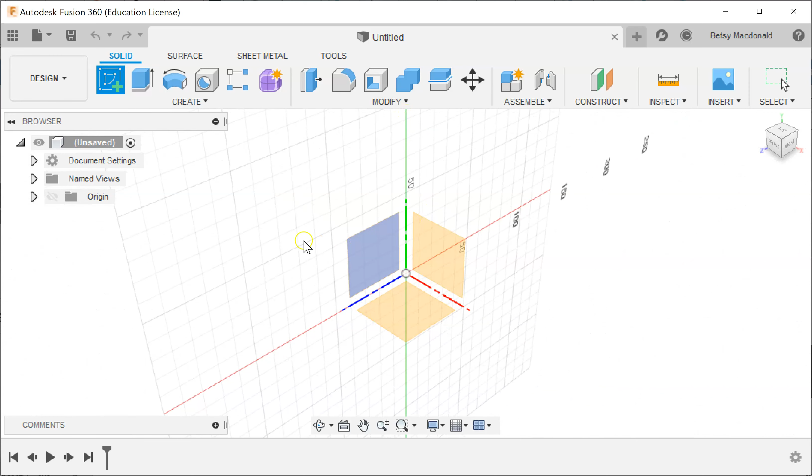So first of all, in order to start with a flat object, you have to create a sketch. You can do so from the Create menu, but there's a shortcut icon right here. So this says Create Sketch. So one of the things I want to point out, well, let me pick my plane. I'm going to draw on the floor like I usually do.

Okay, so this is where the details I want you to pay attention to start. First of all, the whole ribbon changed, and so it's showing us all these sketch tools. It also has a Finish Sketch button. Now, you need to press that when needed, but it's important that you don't press it accidentally. And I'll get to that a little more later.

You can also see it created a Sketches folder, and we're currently working on Sketch 1. It is pretty easy to accidentally make a lot of sketches, and if items are in different sketch documents here, they can't be connected together. So that all goes back to not clicking Finish Sketch unless you mean to.

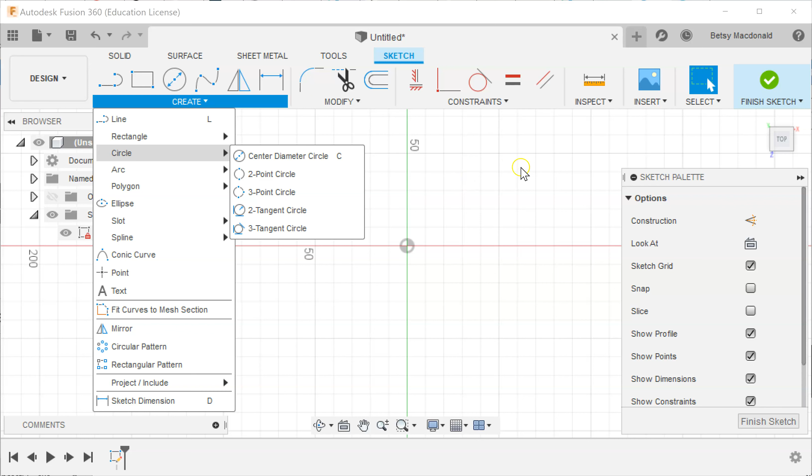So right now I'm in a sketch where I can draw a flat shape. You can see there's a line tool, a rectangle, a circle all ready for me to use. And there are more tools under here. We'll be looking at polygon today, line, rectangle, and circle. I don't think we'll be looking at arc today, but I may end up doing that. If you feel like you don't have enough space, you can collapse this sketch palette. I don't think I'll be referring to that, so I'm going to close it.

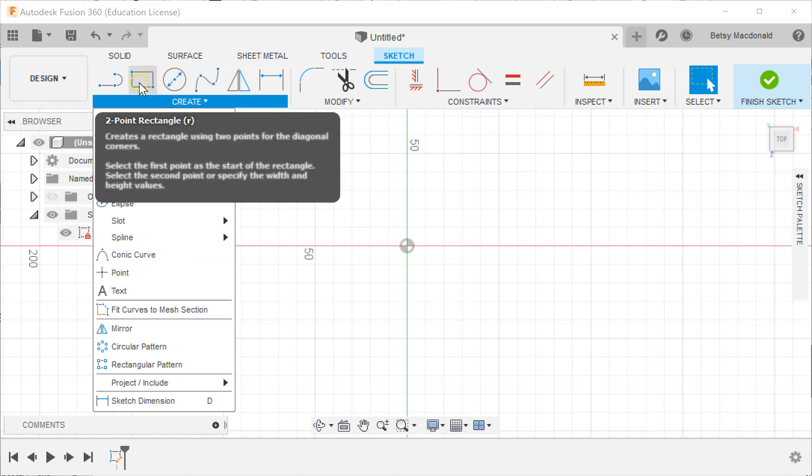Let's start with a rectangle because that's pretty easy. If you expand the menu, there's 3 ways to do a rectangle. I typically use 2-point rectangle, so clicking up here is just fine for me. And just like I suggested with primitives, click the first point, and then you move your mouse to the other point you want to make, and you can click again, and you have a rectangle. These indicators right here are just showing constraints, which I may show you in another video. So that is a completed rectangle.

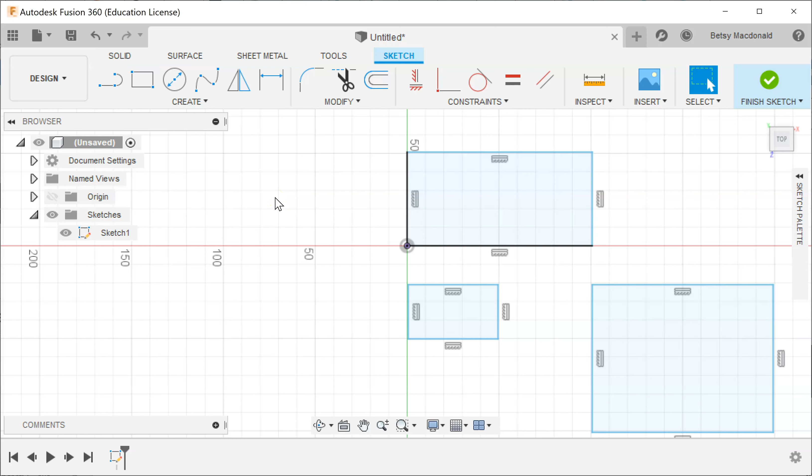You can hit enter for it to take place. Actually, I don't think we needed to click enter, but when I did click enter, I'm not in the rectangle tool anymore. If I hadn't hit enter, it stays in the rectangle tool. So if you want to draw more rectangles, you can. So once you're done with creating rectangles, you can either hit OK. Hitting enter actually is probably the easiest thing.

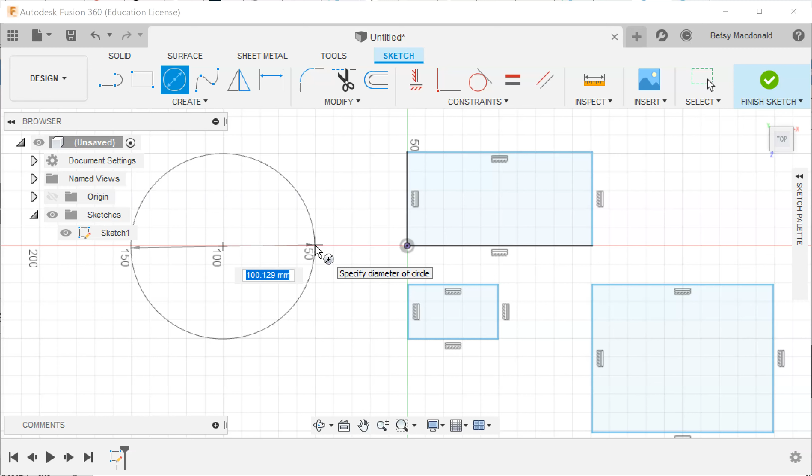The default circle type is a center diameter circle. And so if I click here and pull out, it's giving me a circle, and you can see that it's letting me choose the radius, or sorry, the diameter. So you can type that in if you want to get a nice clean number and hit OK. And again, oh, we're not still in the circle tool. Okay, so there's 4 shapes.

If you decide you don't want one, once you're back in the select tool, you can select one of the sketches you've already made or one of the shapes you've already made and hit the delete key, and it will go away. I think you can just click on it like that and hit delete also. No, that didn't work. So just select around it and hit delete. And so now I'm back to only having 2 shapes.

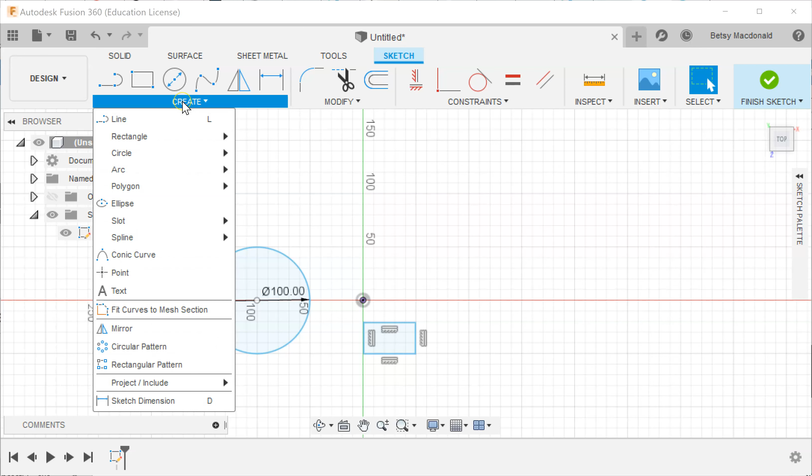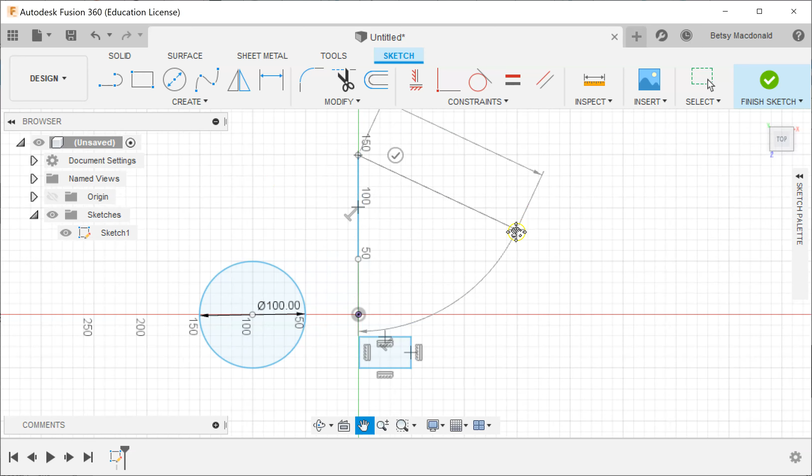Let's look at the line tool first. Okay, so click to start a line, and you can see it goes in any direction. So you can go up like this if you want. After you click another point, it acts as though you want to keep continuing, which is fine. I'm going to go this way. If you only wanted the line, you can click this green check mark and it will stop the line. But let's say you want to make a closed shape. So I'm going to make the shape of a house.

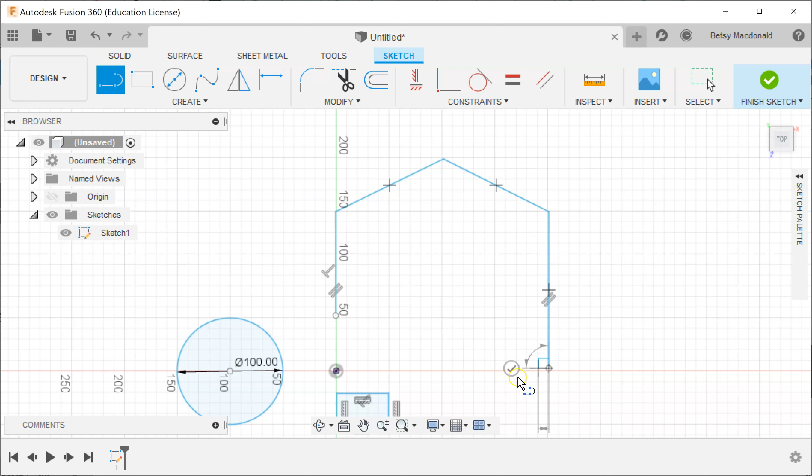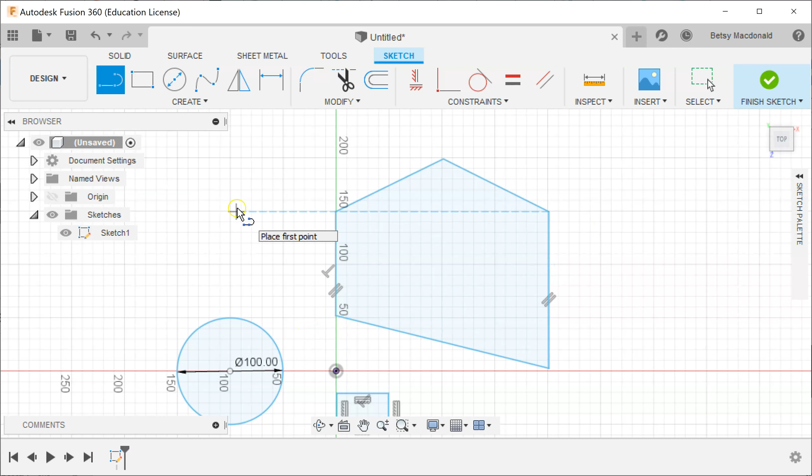So if you want to make a closed shape, whoops, I went too far. That's okay. When you get back to your original line, the line tool stops and you get a closed shape because the line tool is actually expecting that you're making a closed shape. If you're doing something else, you can click that green check mark. For example, and I'm still in the line tool, let's say I want to even this up and I click there.

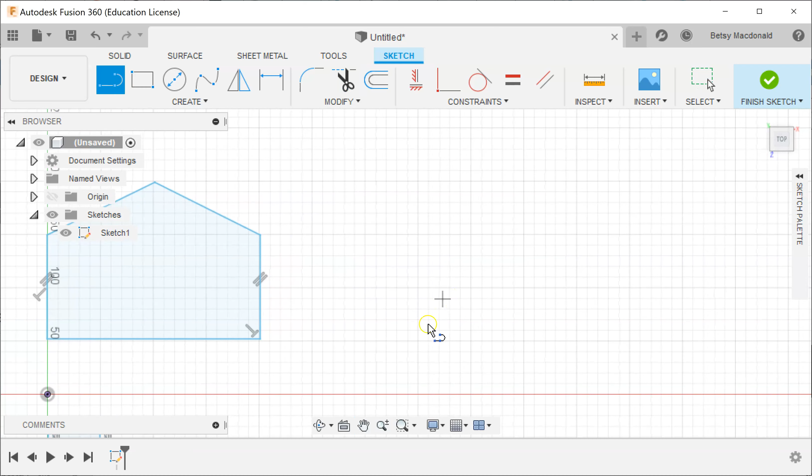That makes a little more sense for what I was going to do, which now means I want to get rid of these two lines, and that's what we use the trim tool for. So if you make lines you don't mean to, you can trim away the other lines. So let's do that again. Let's make, I don't know, what else should we make? And if you accidentally hit that, you're fine. You're still in the line tool. Oh, maybe you're not. If you're not still in the line tool, just go back to the line tool and pick up where you left off. Actually, I'm going to make a C.

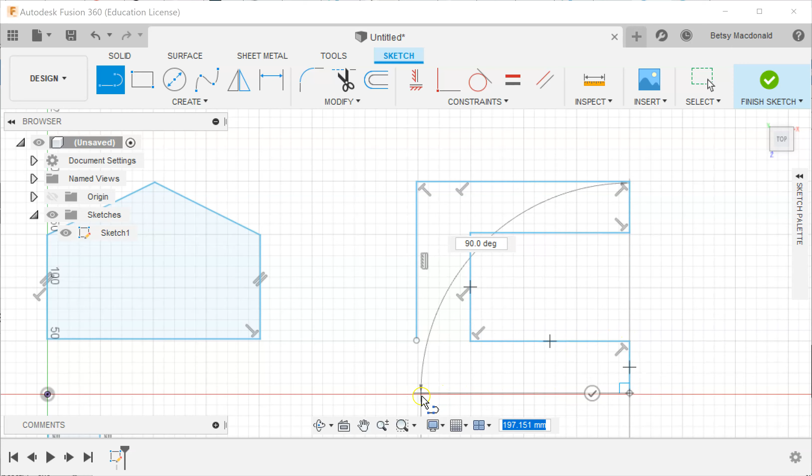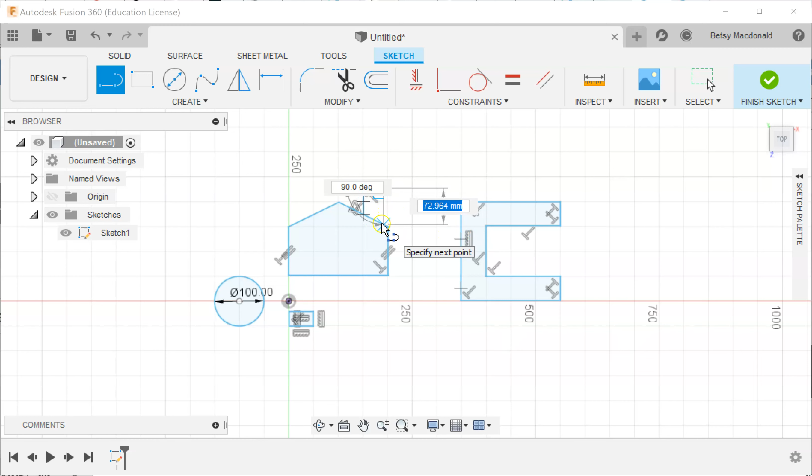There. And so again, you can tell it's a closed path because it fills in blue. So that's the line tool. If you decide that you want to make, let's say I want to make a chimney here, I can go ahead, that green dot's actually in my way. So I got to click the green dot and then add another line. And then if you don't want this intersecting line, again, that's what the trim tool is for. So there's a cute little house, and you'll see what happens more with that in a moment.

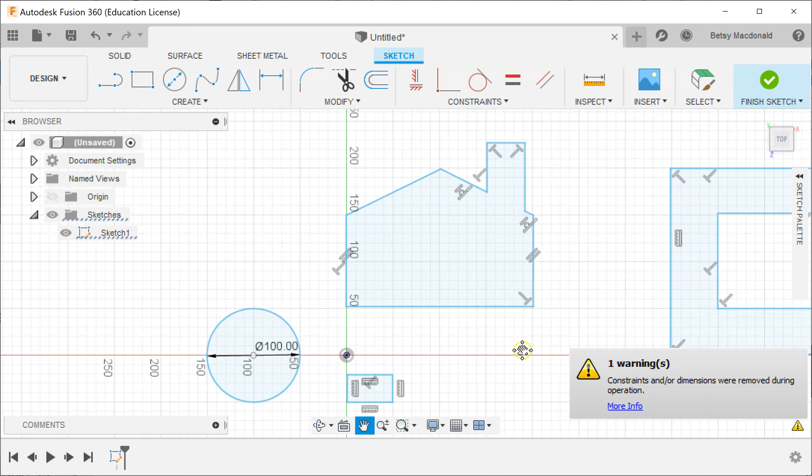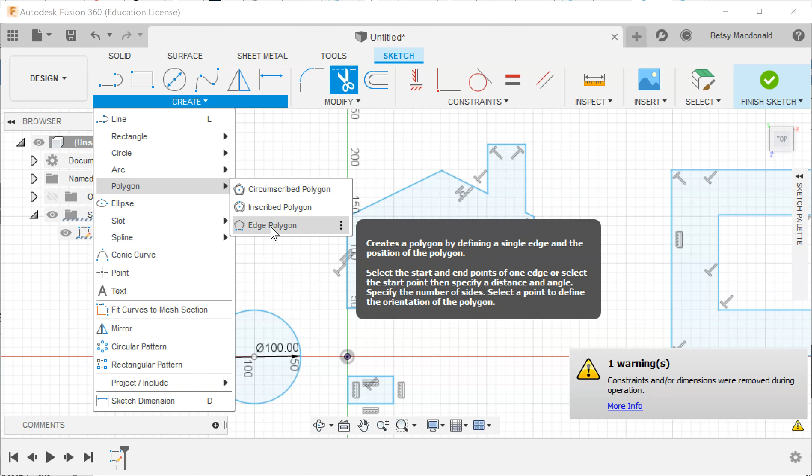Let me show you one more tool, and then I'm going to show you how to turn them into 3D. So if I go to create polygon, there's 3 different ones. I want you to choose edge polygon. Edge polygon makes a regular polygon, which means all of the sides are going to be the same length, and therefore all of the angles will be the same measure. And so after you choose edge polygon, the thing you do next is define how long you want the edge.

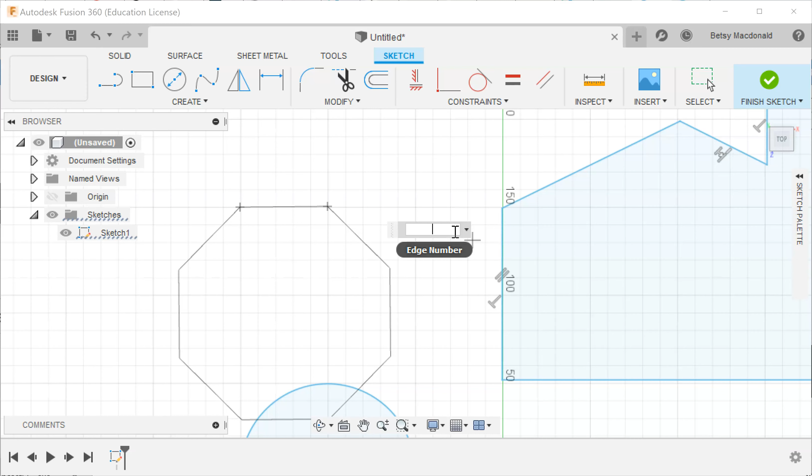So I'm going to say that my edge, let me zoom in a little bit, is going to go from here. I don't think I got it exact because I actually want this to be 0 there. Okay, so once you get one edge done and you move your mouse off of it, it assumes you want 6 sides. You can see it's indicating 6 right here. If you really want an octagon, you can type in 8 and it makes that 8-sided figure. I'm not going to make 8 yet because it will intersect my circle. I'm actually going to go down to 3 and make a triangle. And then I'm going to hit enter and I have a triangle.

Let me go somewhere where I won't be in the way of anything else. So let me go up here, create polygon, edge polygon. So again, you have to define the size of your edge first. And then after you move your mouse, it defaults to 6, but you can type in as many sides as you want. Now don't go crazy with this. If you put in 100 or 1,000, it will try to work. And if your computer hasn't been restarted or if you have too much stuff open, your computer's going to freeze up. So it's definitely good to experiment. You just want to be careful about not pushing the limits.

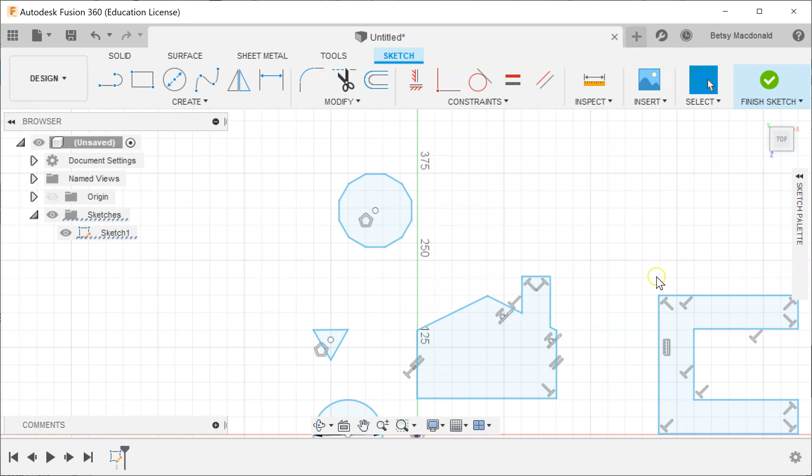So I click OK, and now I have, I believe that's called a dodecagon. So there are 1, 2, 3, 4, 5, 6 shapes here. I'm going to finish my sketch. And so basically what happens is you can see all the sketches I made on the floor. You can see my sketch document is visible. But you can also see that you're back to the default workspace, which is the solid workspace. Okay, and one of the tools here is called extrude. And extrude is so that you can take a 2-dimensional object, which is the ones we have on the floor, and make it into a 3-dimensional object.

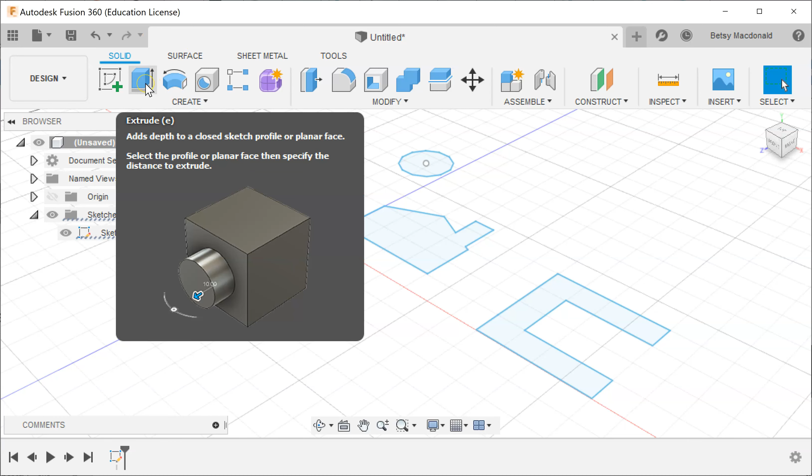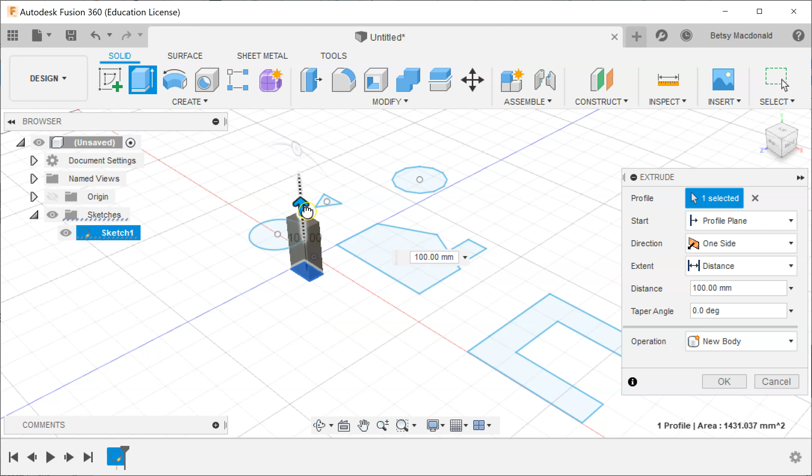So when you click that, if you have something highlighted and you click it, it's going to extrude the thing you have highlighted. I prefer to have nothing highlighted. Click my extrude tool. Let's go with the basic rectangle. And then you see an arrow to pull up, and you're used to that. And so now I'm getting a three-dimensional figure. There's stuff to look at here. I wouldn't worry about that yet. And when I click OK, it's a little bit unsettling. But a couple things happened.

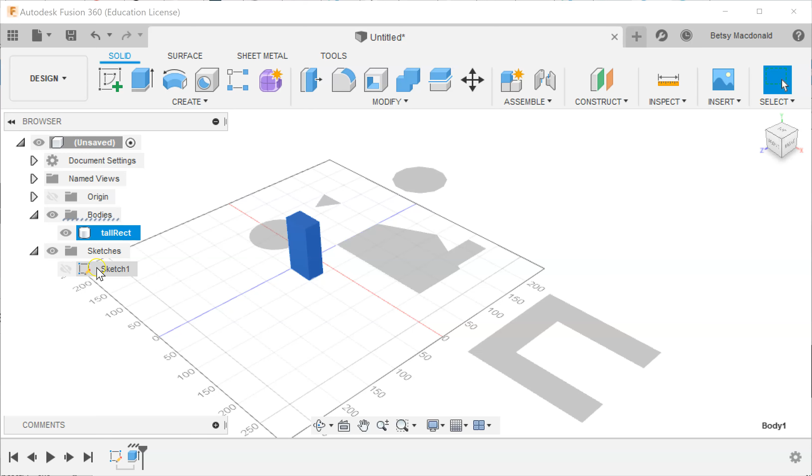One, you now have a body. So that sketch you started with turned into a body. So you can call that tall rectangle. You don't have to name yours if you don't want to. But the reason it looked like my shapes disappeared is because it made your sketch layer invisible. So it turns off the eye. I'm not sure why it does that. So if you're half paying attention, pay attention now. After you click to extrude a body, it hides your sketch layer. Easy to turn back on, you just click it.

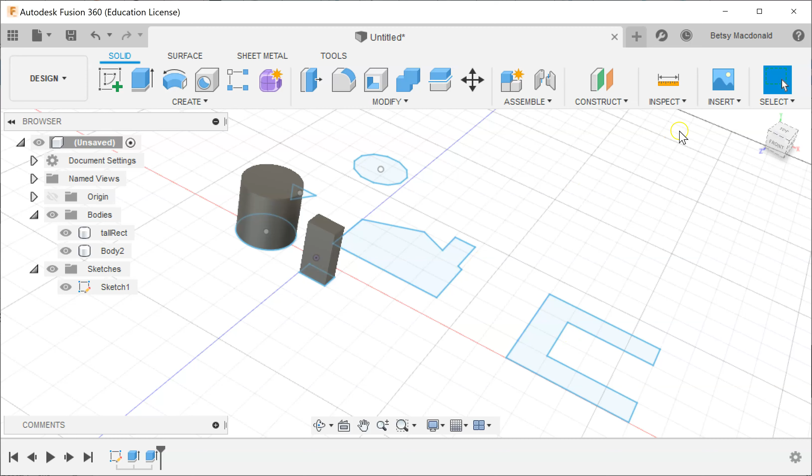So then let me orbit a little bit. So if you want to make your circle a cylinder, you click the extrude tool, pull it up, click OK. And the second time around, it doesn't hide it, which is really nice. Suppose I want to look at this from a different corner. Yeah, that's good. Suppose you made a mistake and you want to edit that extrusion. Just right click and go back to edit feature. And it opens up the extrusion thing again.

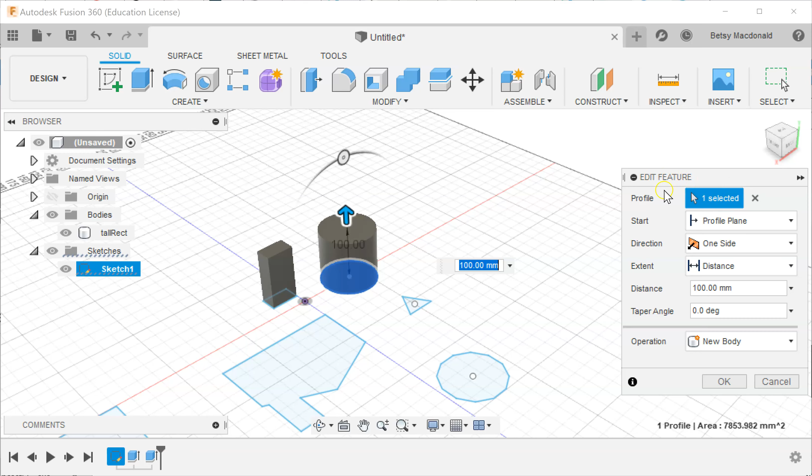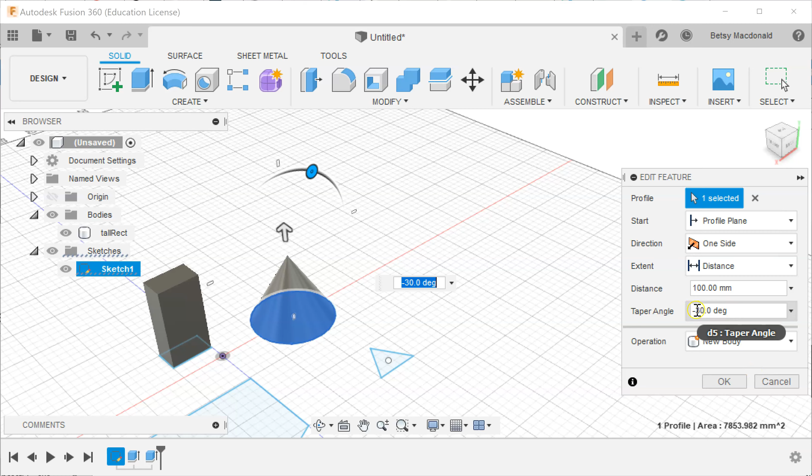And something I've ignored so far is we haven't seen this dial. When we made a cylinder using primitives, this dial wasn't available. And this dial is related to taper angle. So this dial is cool because what it lets you do is it lets you make the top surface much smaller, which allows you to make pyramidal figures. I don't know if that's a word. Anyway, if I do that, and you can see I tapered it by negative 30 degrees, you end up with pyramid-looking shapes. I'm going to do that over here to my dodecagon. So I'm clicking that.

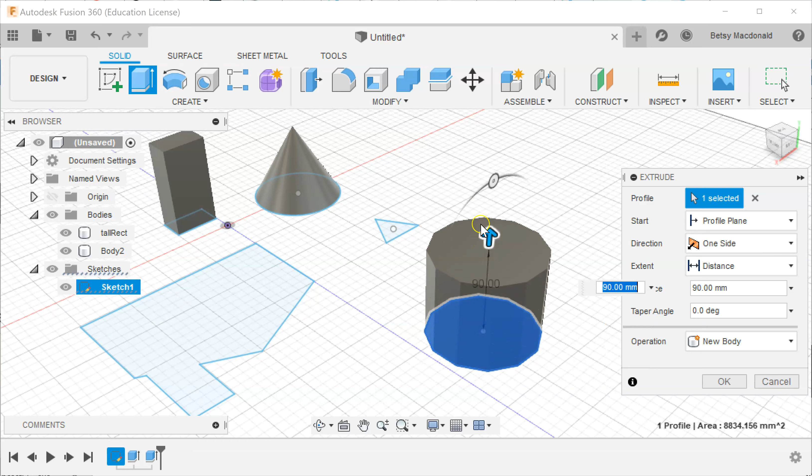I'm going to go to extrude, select that again, raise this up, and then I can use that dial to make it look like a pyramid. If you want a true pyramid, then you would need to start with a perfect square. So let's go ahead and do that.

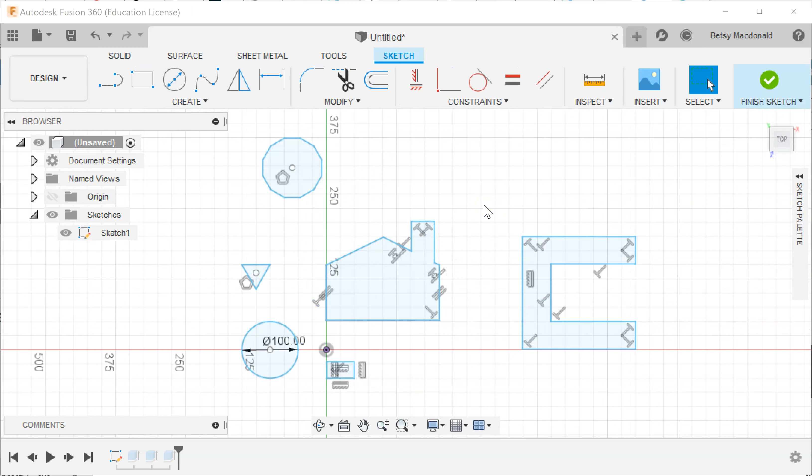Let's add a sketch to the sketch document we already have. So I'm going to double click sketch, and that brings me back into the original sketches I just had. It looks like my 3D stuff went away, but it didn't. It's just being hidden right now while I work on my original sketches.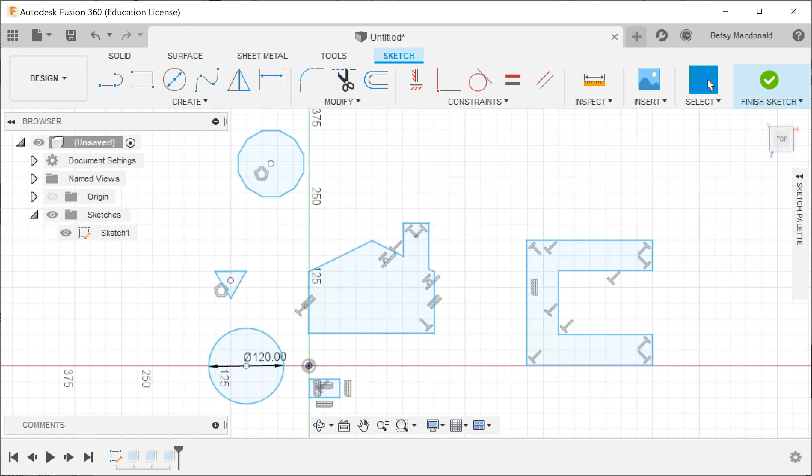Now, one of the things that happen if you decide to change one of these original dimensions and you finish sketch, the extruded one changes with it, which is super nice.

Let me actually name these. So this is my cone, and this is my 12 side cone. I know it's not a cone. Let me write pyramid. Okay, I spelled that wrong, but we're going to forgive me.

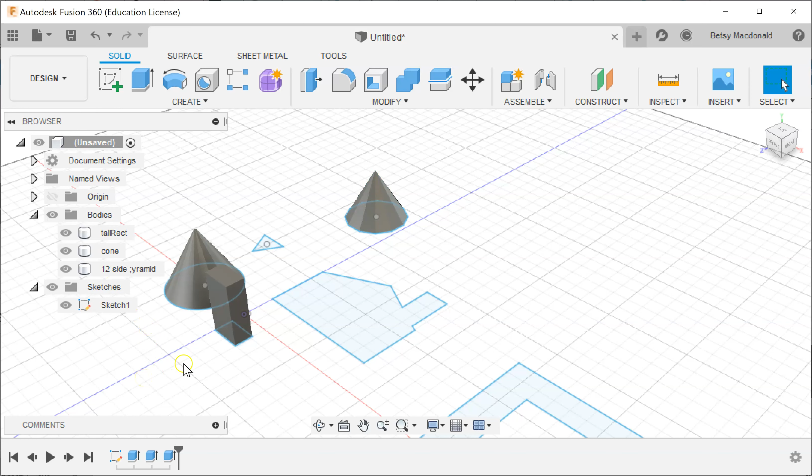So again, if you want to go back to a sketch that already exists, double click this. Do not go to new sketch unless you need to, okay? Because that creates problems later. So I'm going to double click this sketch. I'm going to go to create. Actually, I'm going to click my 2-point rectangle.

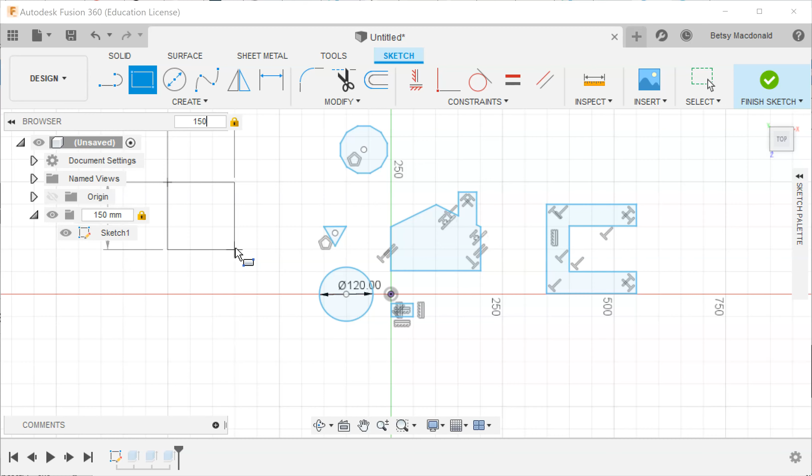And I'm going to make a perfect square. Actually, I will do that by typing in. So let's go 150, tab 150, enter, finish sketch, extrude. When I pull it up, I'm actually just going to type in 150. So I know it's a perfect cube.

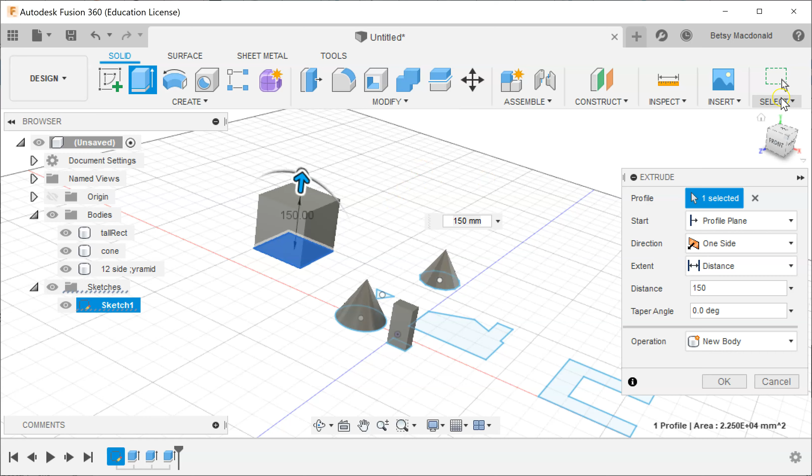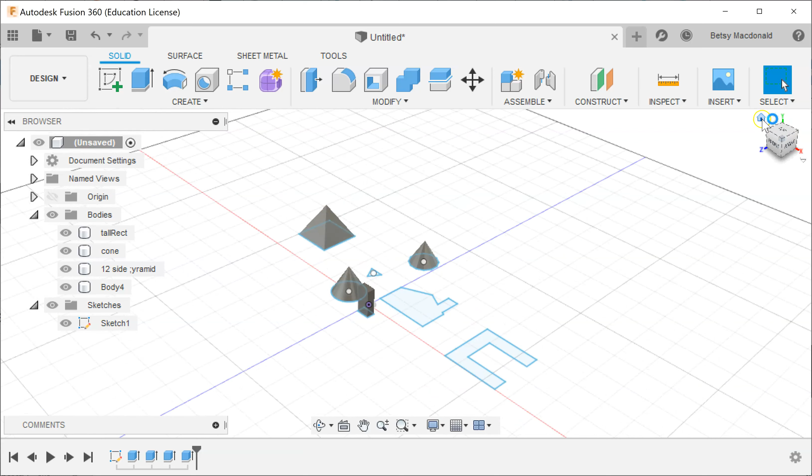And then I'm going to orbit a little bit. I'll orbit with this. Well, what I'm trying to see is getting hidden by my, yeah. Okay, there we go. There. So now that just made a mathematically perfect pyramid. So I will call this pyramid.

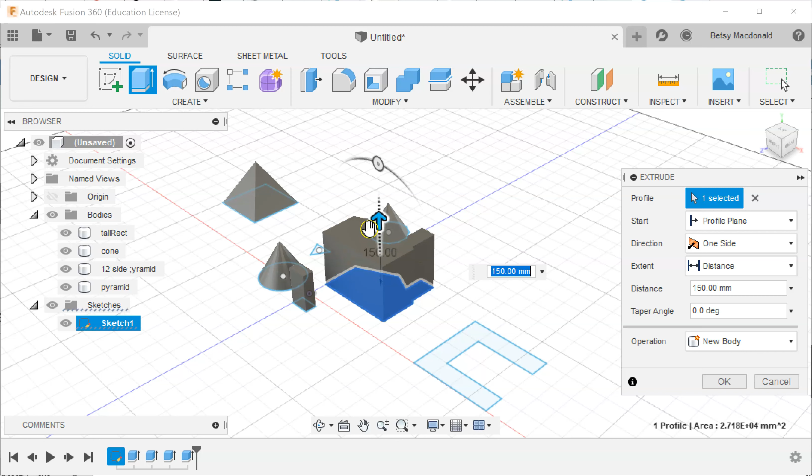And there, yeah. So these other two things, for now, I'm just gonna extrude them. I'm not going to use the taper angle dial, but so extrude, pull this up, click OK. And now you can see all of my sketches are still here, even this little rectangle I haven't pulled up.

So I am going to name this house, and I am going to name this letter C. And actually, these work just like bodies you've had before. You can see when I have the sketch turned on, you can see the original base shape. If that bothers you, you can turn it off while you're working. When you hand it in, I'm going to want you to have that turned on.

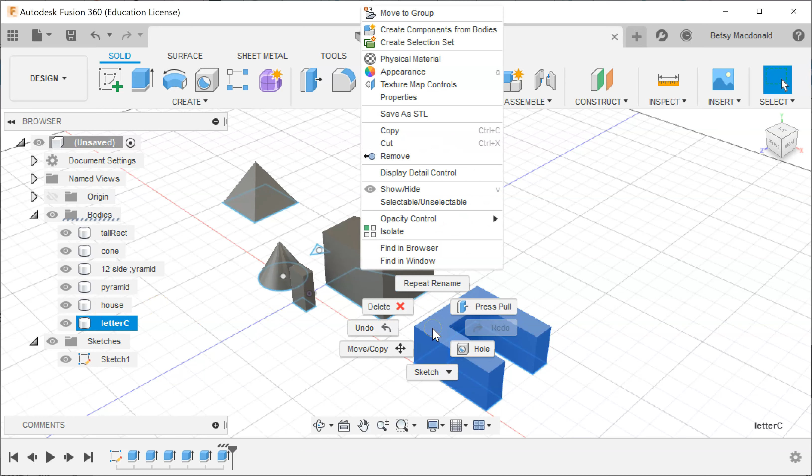But let's say we want to rotate the C. You can still do that like we did the other primitives because it's a body. So I'm going to highlight this body. And you have to highlight first before going to move copy, because it has a lot of flat faces. And remember, if you right click and try to move copy, it does something different now. It resizes that. So I'm going to hit escape.

So remember, if you want to rotate a body, select the whole body first, right click, move copy, and then I can rotate along this angle, and I want that to go at exactly 90 degrees, and then I'm just going to pull it up so I can hit enter. I'm going to do the same thing with the house.

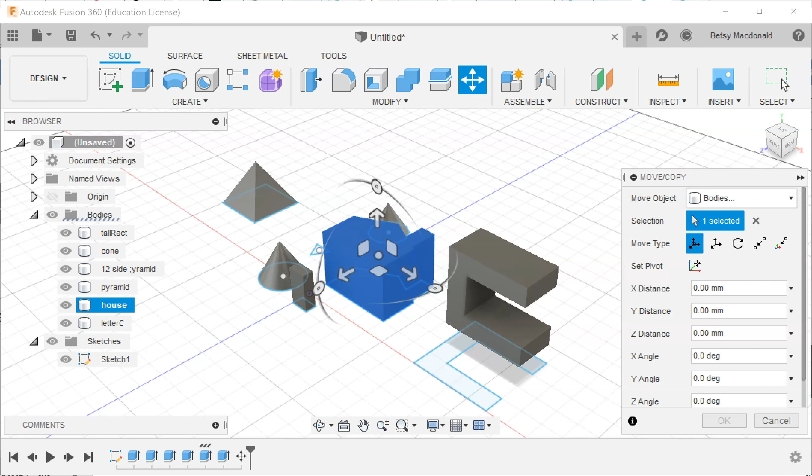So I'm going to select the house, right click, move copy. I'm going to rotate it on the x-axis 90 degrees, and then pull it up, and I'm actually going to push it back so I can see it better. So I'm going to push it over here. And I think I'm going to move this too. Notice the sketches stay where they were.

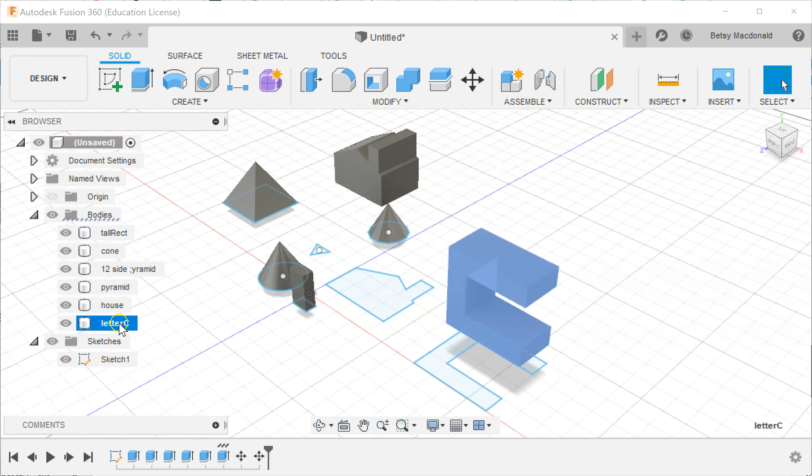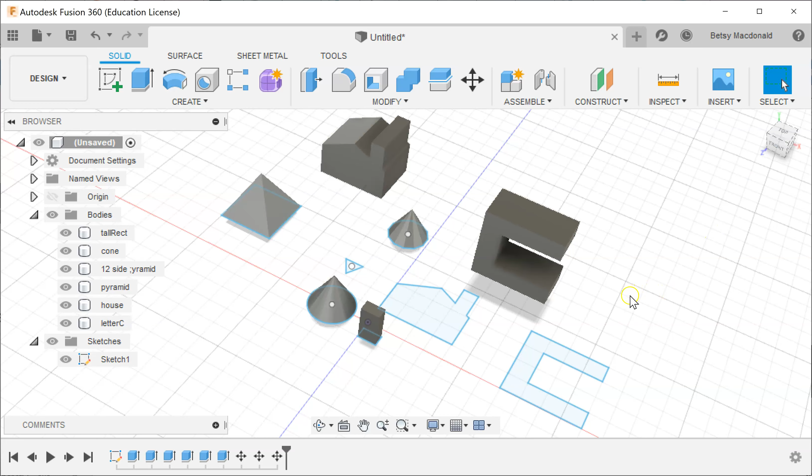I'm going to move the C again. Whoops. So I'm going to select the C, right click, move copy. I'm going to push it back that way. Click OK. Yeah. And then I'm going to orbit a little bit to get it into a good position. That's probably a decent position. Whoa, that is not a good position, so I got to start all the way over again.

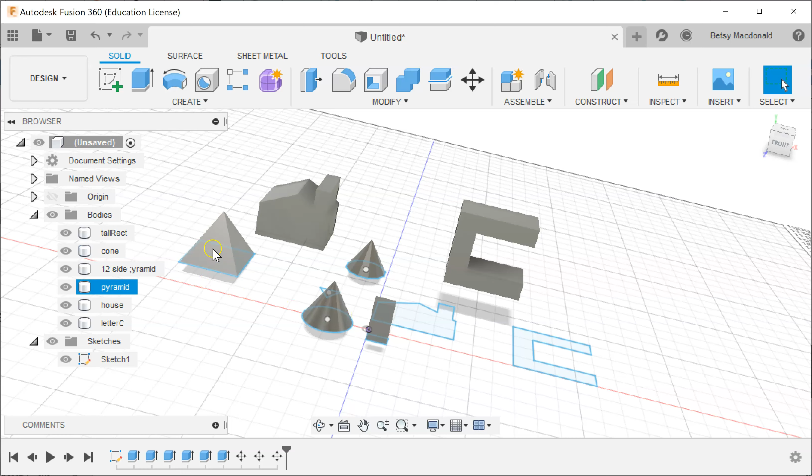You're going to make these figures. So I'm going to copy this so you can see what it should look like when you're done with the assignment. But your assignment will be to make a house, to make a letter. The C is pretty easy. Actually, I think I'm going to just tell you guys to make a C. You're going to have a polygonal pyramid with 12 sides. You're going to have a cone, and you're going to have a true pyramid.

And I think you are going to have a taller box. So I'm going to stop this recording. But your project at the end of today, or whenever you finish it, is going to have all of these shapes.

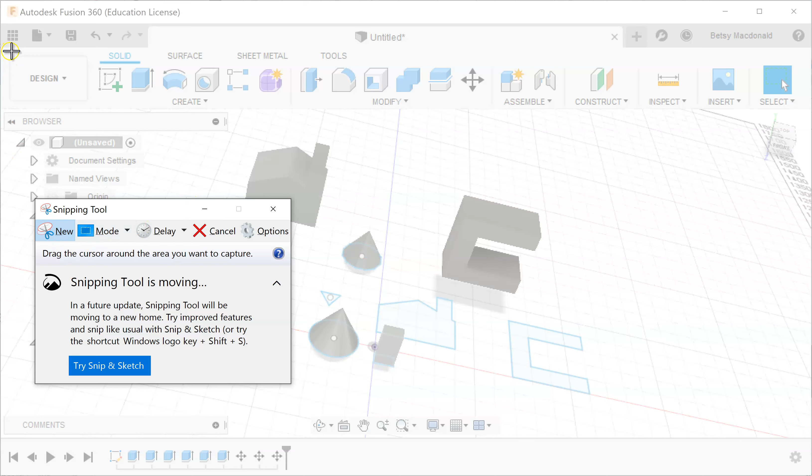So remember, when you go to snip it, I always want your name, but I'm also going to want to make sure your sketches folder is expanded and on, because I want to see your sketches on the floor. And I'll also want to see your bodies expanded. So I'll paste this in the assignment and answer a few more questions in class.